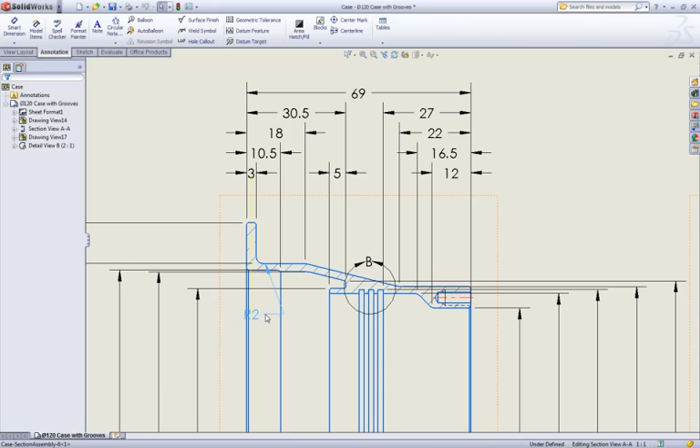When creating drawings, you've always been able to take advantage of reusing dimensions from the model, but sometimes this can take a long time and be a little bit fiddly, so many people just resort to adding dimensions manually. In SolidWorks 2011, however, you can happily throw them all on the drawing in one go. You can see it's done a really nice job of organising the dimensions so that none of the leaders overlap and everything is spaced out nicely.

You may need to manually move some of the radius dimensions, but look at these concentric diameters. Even the text is staggered so that they don't overlap. A real productivity gain. SolidWorks assumes you put the section view and the detail view on the drawing for a reason and prioritises dimension placement on these views.

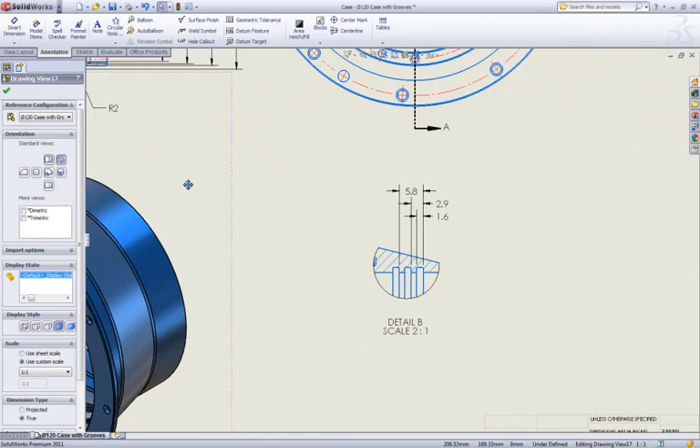Now when you select multiple dimensions, the dimension palette includes an extra row of icons for dimension layout and alignment control. The handy thumb wheel makes it easy to adjust the spacing between dimensions, and the text alignment ensures your drawings are easy to read.

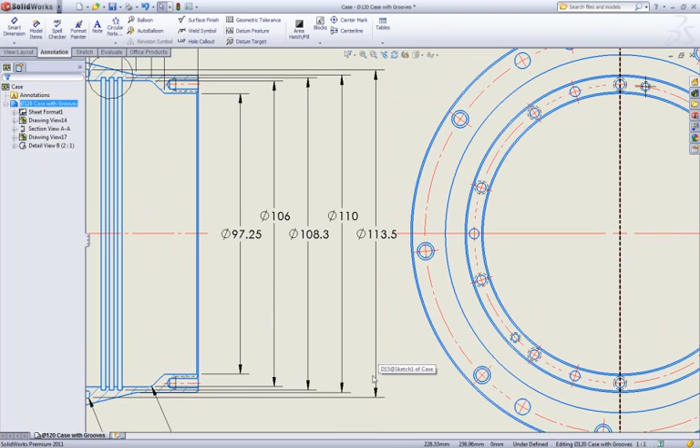Let's take another look at the staggered dimensions. If you edit them using the dimension palette and show limit tolerances, for example, this will of course mess up your layout. This is where the auto arrange button saves the day. You can then modify the spacing if things are a bit tight. Adding dimensions using the rapid dimension manipulator will of course move dimensions to fit them in the right place.

But just to show that it's not a trick, we'll mess this drawing up by moving a few of the dimensions, go to the dimension palette and use the auto arrange. This is the exact same code that SolidWorks uses when placing the dimensions in the first place, so you can be sure of consistent results.

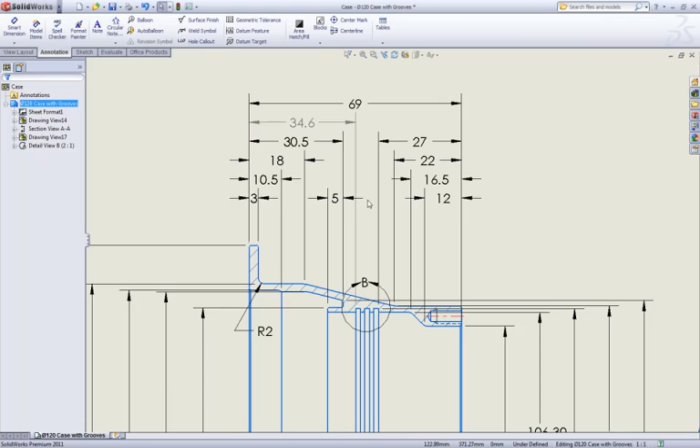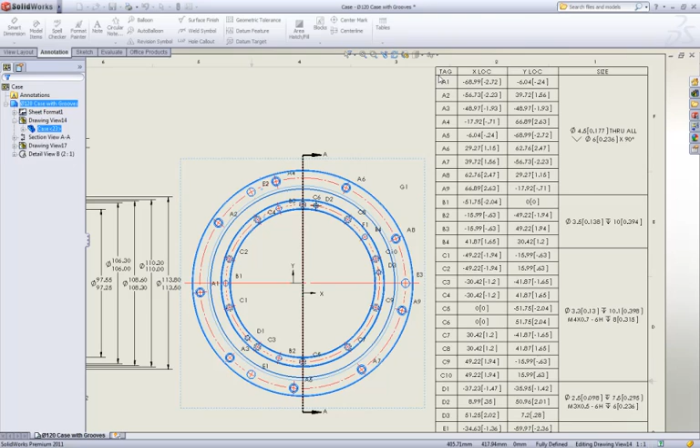One of the most highly requested enhancements in drawings is the addition of dual dimensions in hole tables. This is a great way of removing any ambiguity when working with multiple suppliers or outsourcing manufacturing overseas. The exact format of how they look can be controlled from the options dialog, but there is also quick access on the right mouse button to switch this feature on or off, or to add units to make it clearer which is which.

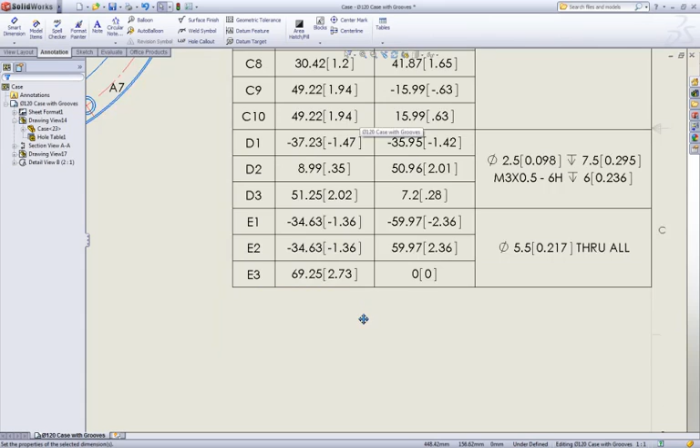Adding or removing rows from the table can easily mess up the tag sequence in the table and on the drawing view. In SolidWorks 2011, you no longer need to manually renumber the tags in the table. A simple right mouse click sorts it all out for you.

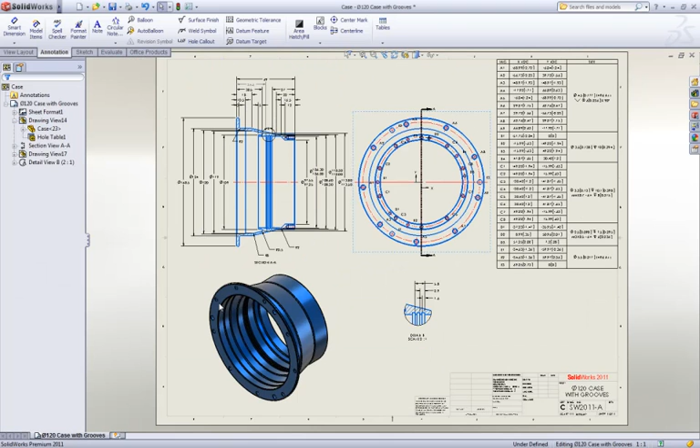There are of course many other enhancements, like using the model colour in the drawing as shown here, and when rotating a 3D view you no longer have to save the view first. So check the What's New guide for a complete list of productivity enhancements in SolidWorks 2011.